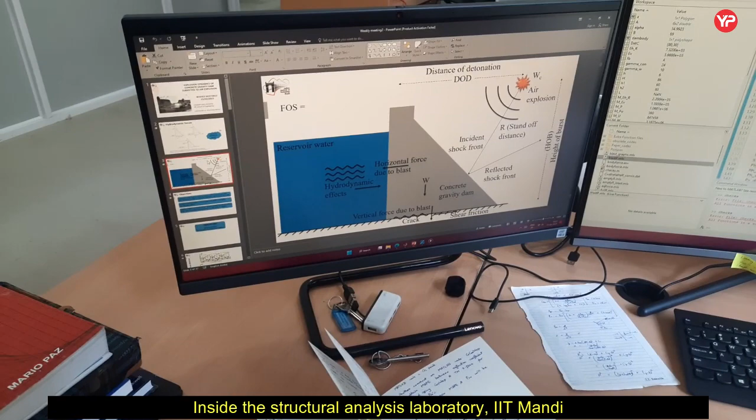What I have been trying to do is find what will be the equivalent force that acts on the concrete gravity dam. Let's say there is a dam in some very disputed area like in Arunachal Pradesh, the Tawang region, and this is a concrete gravity dam, supposed to be a large structure. Since the structure is very large, there is a very large impact area. It can destroy a lot of life if it is subjected to any impact or damage.

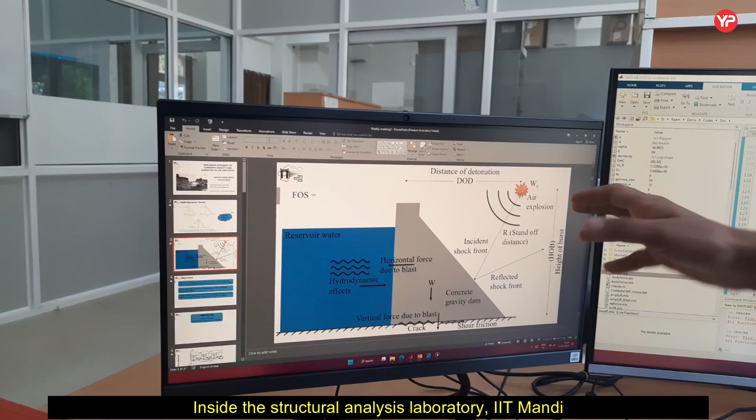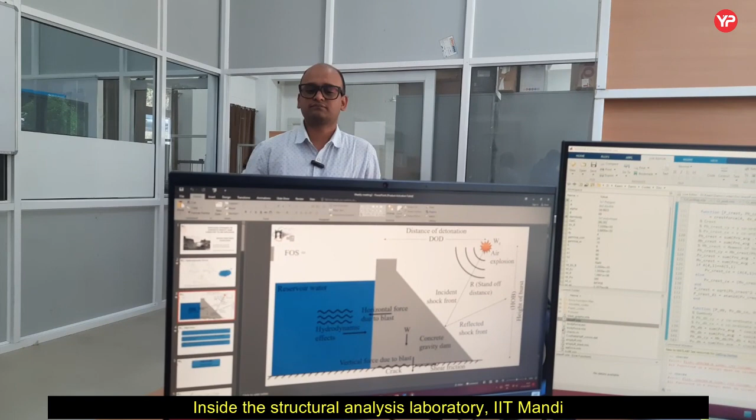So let's say there is a problem where there is an air explosion near the dam. There will be some forces acting on the structure, producing shock waves to the dam and reflected pressure. So now, there is pressure on the structure causing vibrations. That vibration will also affect the reservoir water, and that reservoir water will also affect the dam. So there is a possibility that it may get damaged.

So this is now my equivalent model, a mathematical model that I have prepared. I am converting it into a series of SDOF systems, and I am trying to calculate the response. First I want to show this video.

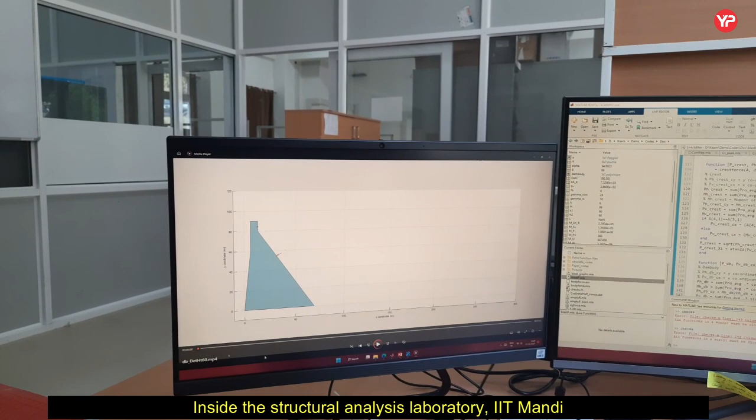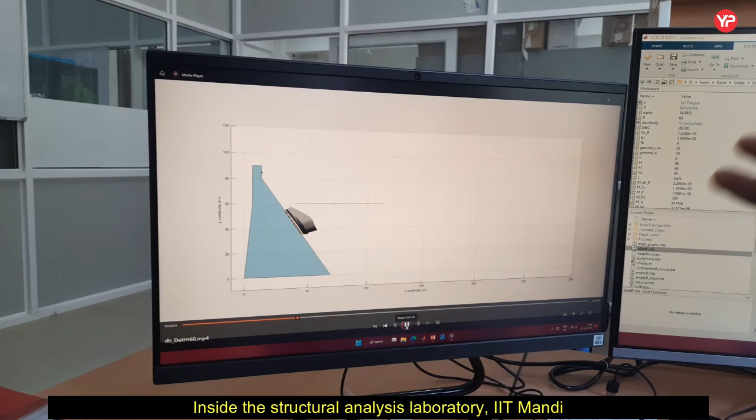Let's say there is an explosion center here. Now this explosion center is moving away from the dam, and the center of force is moving on the structure. This center of force will be used to calculate the equivalent response of the structure. As you can see, if this detonation center is very far away from the structure, there will be almost equal force at the center of the structure only. Same goes for here.

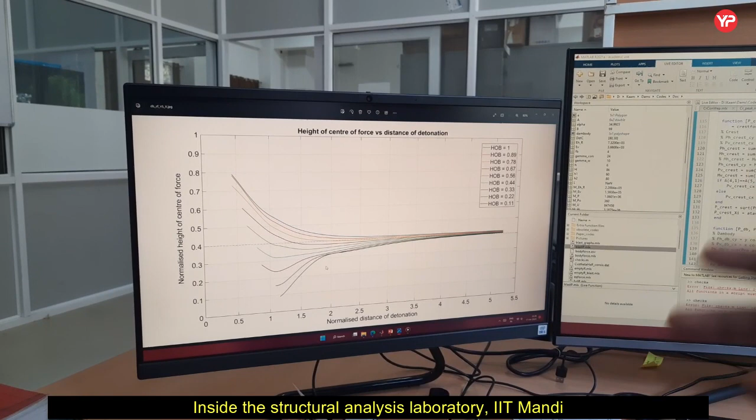These are some curves that I generated showing how the height of burst is varying and how the normalized distance of detonation is varying, and where the center of force will be on the structure. This algorithm will be used to find such conditions, and the same algorithm can be used for designing the structure, to calculate what should be the design load on the structure. After that there will be response calculation, and we'll see how much measures we should take to avoid such damage to the dam. That's all for now.

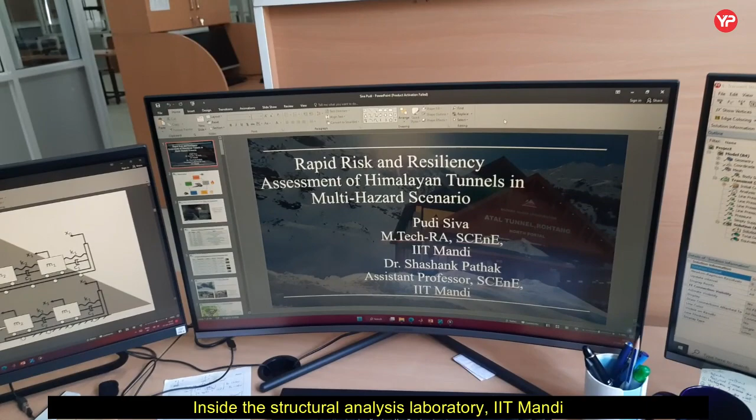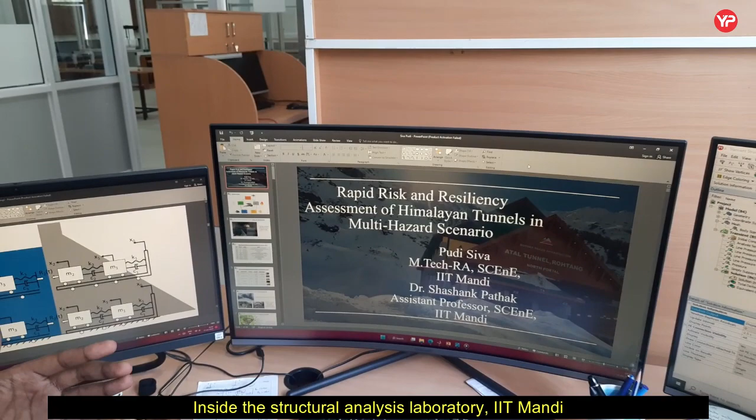As Shashank sir already mentioned, based on mountain regions, we are mainly focusing on what threats are possible in mountain regions, like avalanches, landslides, and vehicular explosions. As Shashank sir also mentioned, it is of strategic importance because Ladakh is a region which will be closed for 6 months during winter seasons before the Atal Tunnel. But after the Atal Tunnel started, there is now troop movement throughout, so it is strategically useful for the growth of the country.

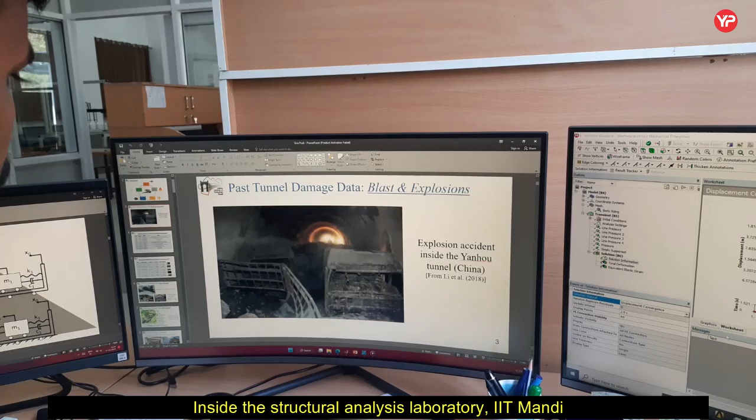So we did some literature review on tunnel failure case studies. We observed some blast explosions that happened in China - there is a tunnel - and also vehicular explosions as I mentioned. Some incidents happened in previous years in tunnels, resulting in failure of the structure and also loss of life. So now we come to the risk methodology.

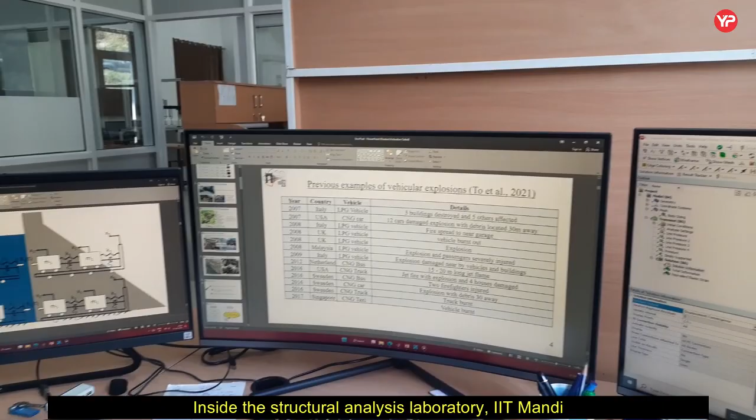Basically, we are focusing on developing a methodology which will tell the damage level and how much risk it is prone to, considering all the threats. I studied the FEMA manual - that's a US federal document. They developed a risk assessment for urban tunnels, those are metro tunnels. But when it comes to mountain regions, the situations and geological conditions will be different compared to urban areas. So we are mainly focusing on the factors which cause threats to our underground structures in mountain regions. We only consider those factors, and we are developing the methodology - that is, a rapid visual screening.

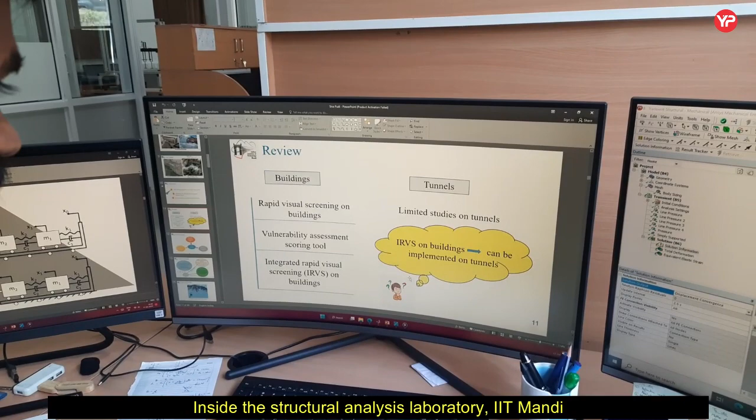As Shashank sir mentioned, we are considering different threats, so this is an integrated rapid visual screening process. We went to the Atal tunnel region and observed what precautions they have taken to mitigate avalanches and landslides, and how to protect the structures.

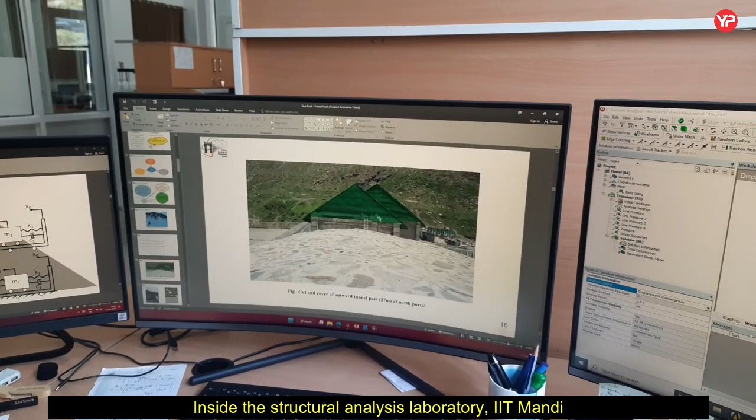We observed some nets to reduce the flow of avalanches. This is the portal, the north portal of the Atal tunnel, where a cut and cover method is happening, and beyond this there is rock bolting. Rock bolts are mainly used to stabilize the ground, helping to reduce the possibility of landslides.

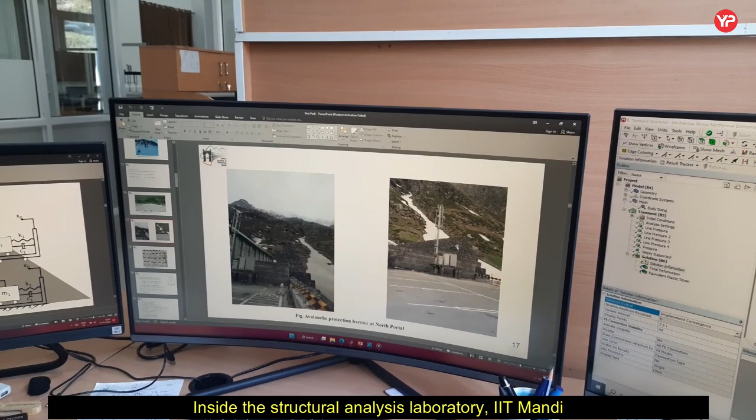These are some walls known as gabion walls, mainly useful to avoid avalanches. These walls are used instead of RC walls because RC walls are more expensive. Gabion walls are constructed using whichever material is available at the site, and nets are used to stabilize them.

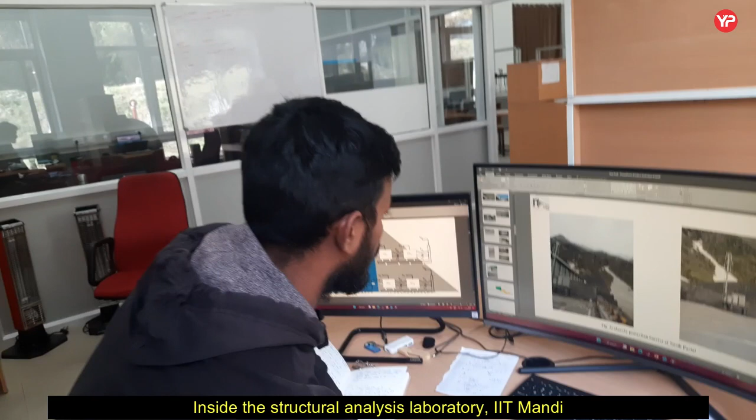Based on this, we don't know how or when a threat will happen, so there is uncertainty involved. To calculate this uncertainty, there is a process called the fuzzy process, which helps find the uncertainty. So mainly our process uses fuzzy logic.

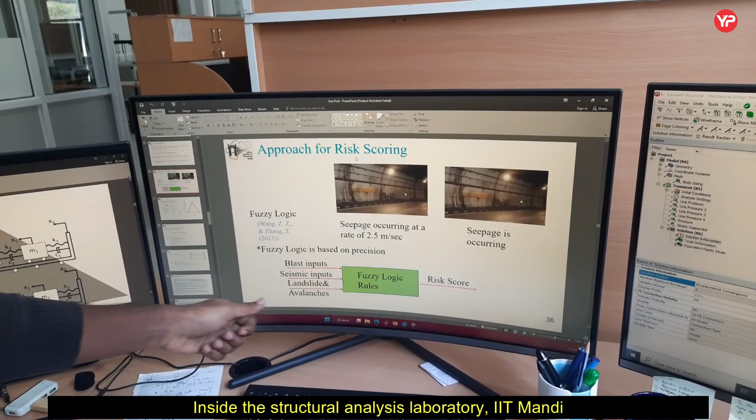This is our approach for risk scoring. We use fuzzy logic, considering the parameters used in risk scoring, and assign the uncertainty level, which finally produces a damage score, that is the risk score.

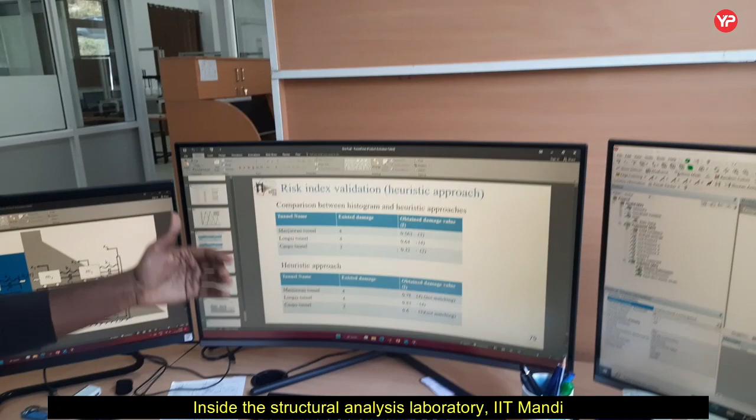I also compared some tunnels affected by the Wenchuan earthquake that happened in China. These tunnels underwent a seismic assessment. We developed our approach and checked their damage levels against our damage levels to see whether our results were validating. It is validating, with some damage deviation that we are still working on.

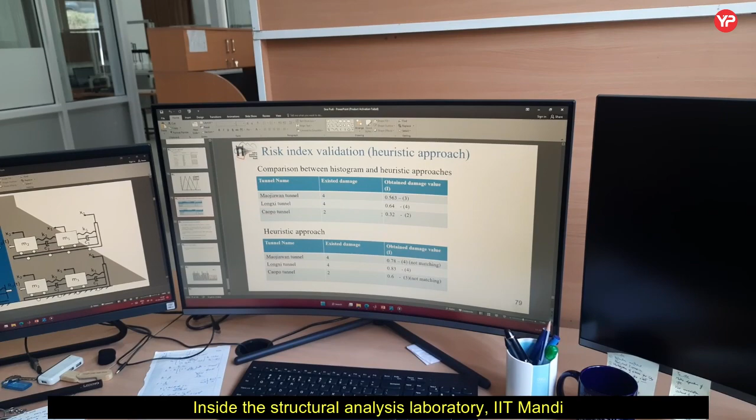So you mentioned the score, that some input is there along with the fuzzy rules, and after that you get a score.

Yes, I will show. This risk score is there. Is there any numbering, like 1 to 10? We are taking 0 to 5. In fuzzy logic, we considered 5 damage levels, 1 to 5, where 5 is the maximum, the high level.

Based on the coming damage index, we will also tell them what mitigations are available to reduce the risk. So you are identifying the damage level and giving a score of 1 to 5. Okay, then what happens after that?

Suppose the damage level is 5, then there is a risk the structure can be damaged. For any risk, there are some parameters posing that risk. For landslides, the slope condition is maintained, and to reduce landslides, we will suggest mitigation structures.

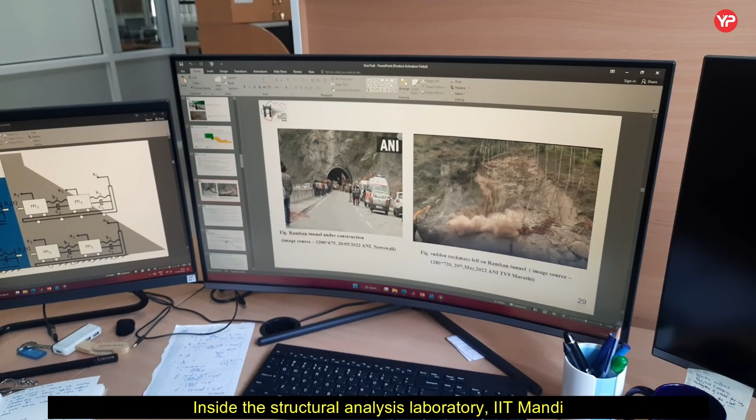So these factors we will highlight for upcoming tunnel constructions, that if we construct the portal at these locations it will be dangerous. So the tunnel alignment will need to be changed.

Some type of mitigation we will give. So if any structure gets a damage level value of 5, does it have to be changed, or what if it has 4 or 3? Then no need to change it entirely, we can take some measures.

For example, if it is coming out to be 5, it means there are some serious issues in that structure based on our risk assessment methodology, and then you need some kind of corrective measures which can reduce the risk.

This risk scoring is done based on several questions. He has prepared around 60 questions for which the data is collected using the rapid visual screening and interviewing the engineers at the site.

Based on that we came to know these are the problems in the structure, and if we want to reduce the score, we need to reduce the individual scoring of those questions, and that can be done only by doing some corrective measures.

5 is the highest risk and 0 is the lowest risk. If there's something in between, we can check whether, suppose there is a risk, what will be the consequences if failure happens, and are those consequences going to be very severe. Also, funds are released by the government time to time for maintenance of the tunnel structure.